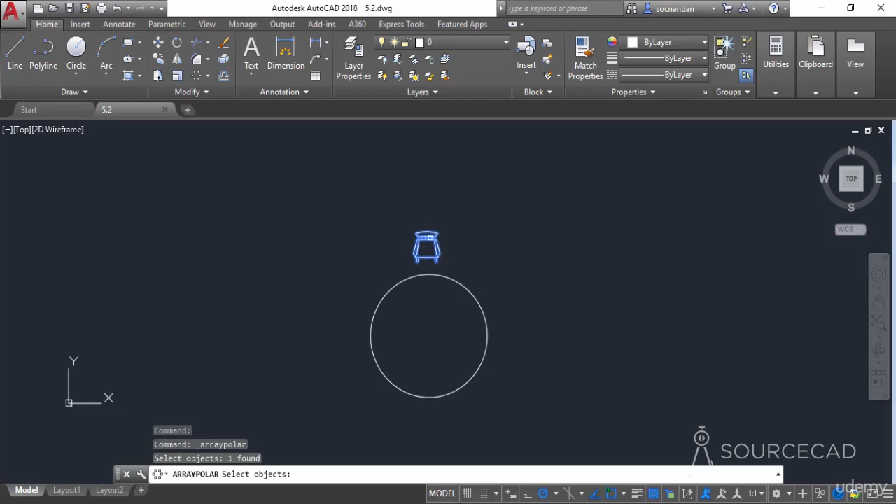So select, press enter. Now you need to specify the center point of array. So the center point of array will be the center point of this circle. And now here we have a default array in this case. So again, we need to change the objects, and here in this case we have 6 objects, but we want 8 objects. So let's click here, change it to 8 objects and press tab key. Now we have 8 objects here.

Now the angle between all of these objects is automatically calculated, and here it is 45 degrees, and also the total angle is 360 degrees. But you may or may not want this value. Let's say that we want to fill this complete set of chairs in between the 3 quadrants. We don't want any chair in this quadrant, let's say. And for that, I'll simply change this value to 270 and then press the tab key. And now here we have it.

So now all of the 8 chairs are arranged in between the 270 degree angle, and we don't have any chair in this quadrant. If you want to change this value back, then simply select 360 degree angle. Now they are completely filled here. Similarly, we have the number of rows, which is 1. You can change it to 2 or 3 or whatever value you want, but obviously in this case we don't want these many rows, so I'll simply change it to 1 once again. And the level is simply the number of objects in the z-axis, which will not be visible in this case.

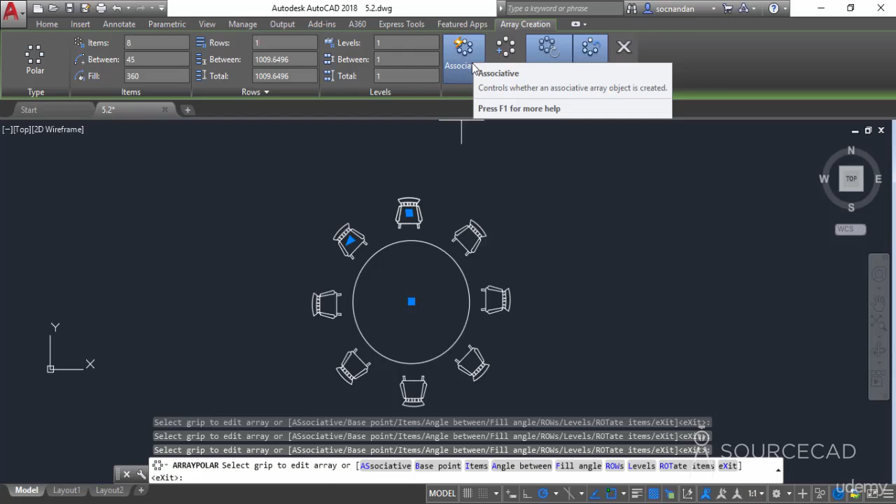Now if you recall the previous case, we have made an associative array in case of rectangular array, and using the associative option we were able to modify the array even after creating it. So we will again keep this option checked in this case. We will make it associative, and later on we will modify some of the objects in this array also. Now we have an option here which is rotate items. So currently the objects are completely aligned towards center, so all of these objects are simply rotating.

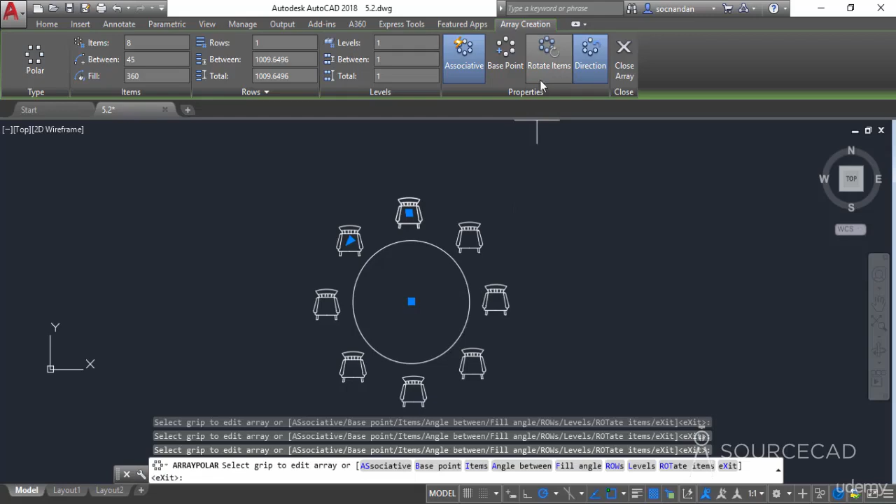But what if you don't want that? For that, simply click on this rotate items, and now you can see that the original object and its configuration will be retained for all of its array copies. So if you want this kind of array, you can keep this unchecked, but we don't want this, so I'll keep it checked so that the chairs are aligned towards center. And now click on close array.

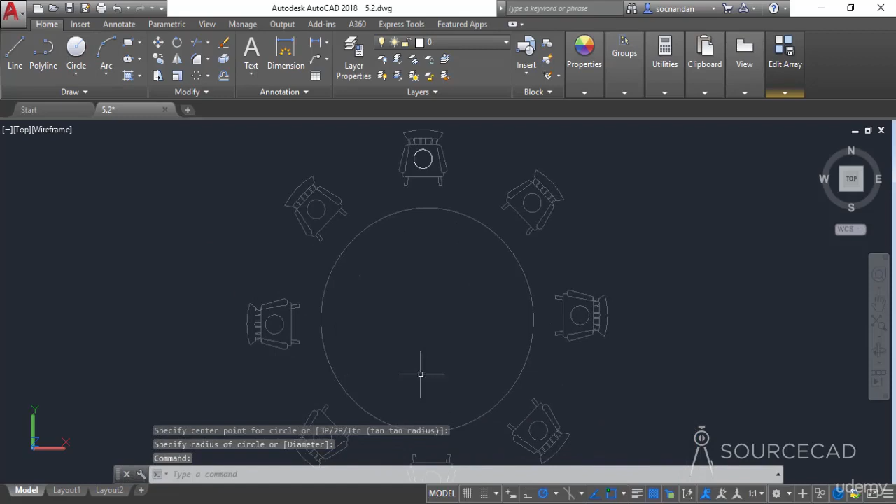So now we can again modify this set of array, and for that I'll select the array and click on edit source. And once again I'll click on this object, select the array, click on OK if this message appears, and let's modify it. So I'll add a circle here, and you'll see that the same circle is added on all its copies. Now I'll save the array. And here we have it.

Now even if you want to change any single object from this array, you can do that also. So I'll select the array once again, and now I'll select this replace item. And now we need a replacement item for this, so we need to first insert an object. So I'll select this block here. We'll learn about these blocks later on, and for now just make a mental note of this. So here we have this object.

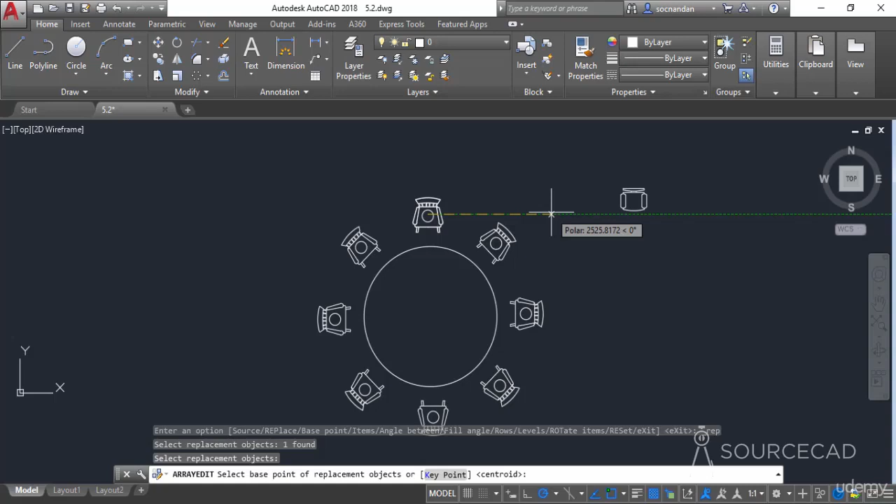Now once again I need to go to the array, so select the array, again go to this replace item, and now select the replacement object, which is this one, and now press enter. Now you need to specify the base point of replacement object, which is somewhere in the middle here. Now we need to specify the array object which you want to replace. So let's replace this chair. So I'll select this chair and select the array, and here we have it, the replacement object is added.

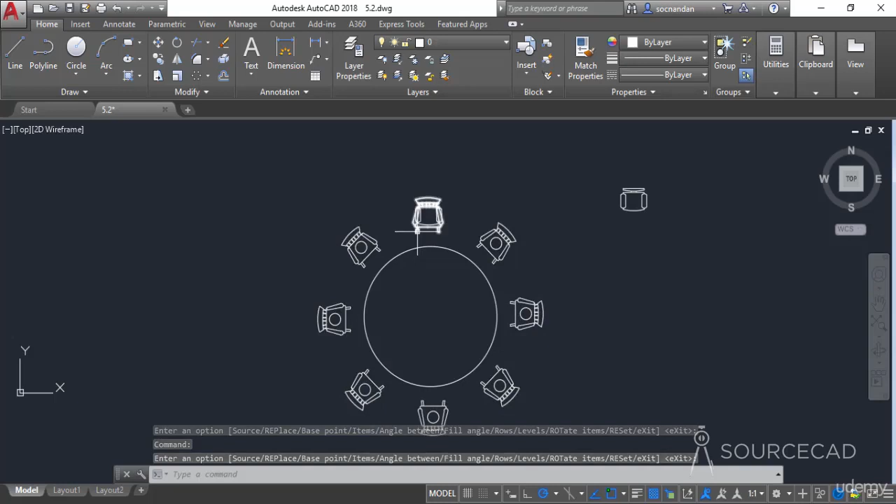Now simply press enter and press enter again to exit this. You can also close this array. Now we have 2 objects here, and we need to delete the original arrayed object. So I'll select this one, erase it, and now here we have it. So now this copy is a part of the new array, and it has been added as a replacement. We can now erase this object also, it's no longer required. So in this way you can replace any copy of this array from the complete set.

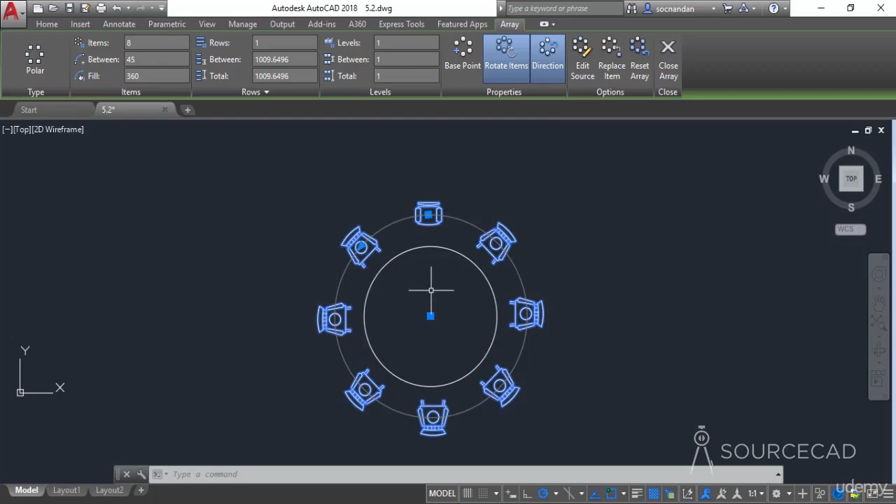Now in this case if you select any single element of this array, all the objects will be selected, because while making the array we kept it as associative. Now if you want to make these objects completely separate from one another, then you need to explode the complete array, and you can explode it simply by typing X on the command line and then pressing enter. So that will explode it, and you can also use the explode tool here, which will also explode the same set of array. Both are the same tools. You can use the command equivalent X, or you can use this icon here.

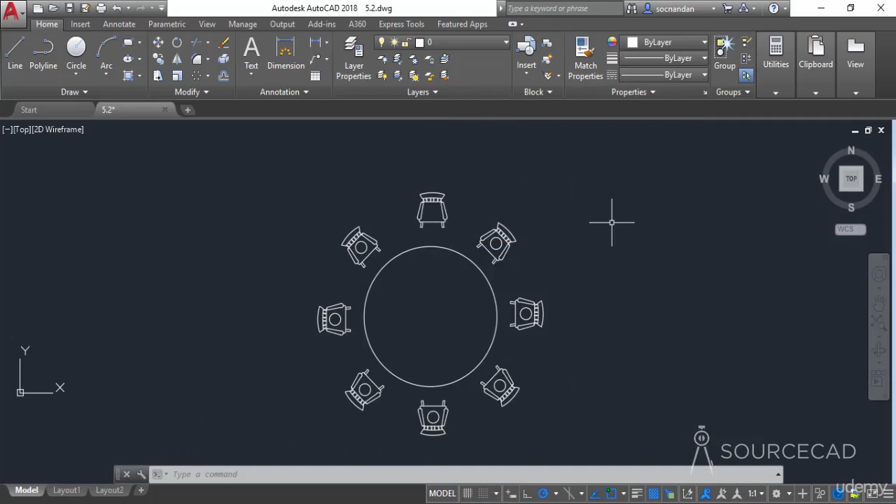Now if you click on any of the objects, only that object will be selected, and also this array is no longer associative, and hence we cannot modify it further. But you can obviously replace objects, you can remove them, you can add extra objects if you want, for example here, but it will not remain a part of an array. So this was all about the polar array tool of AutoCAD.